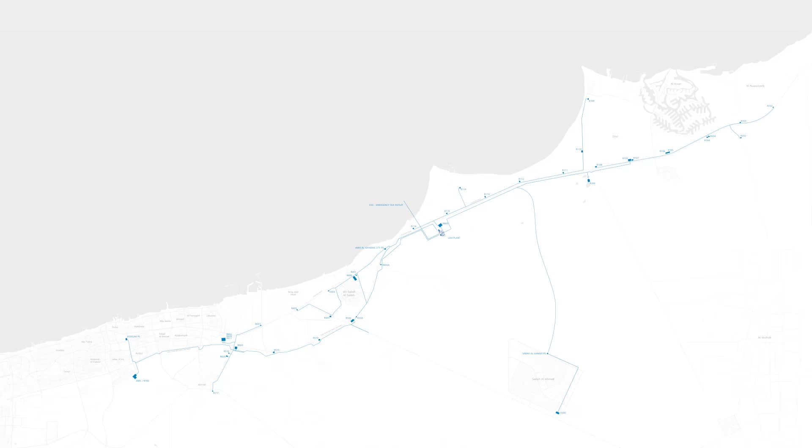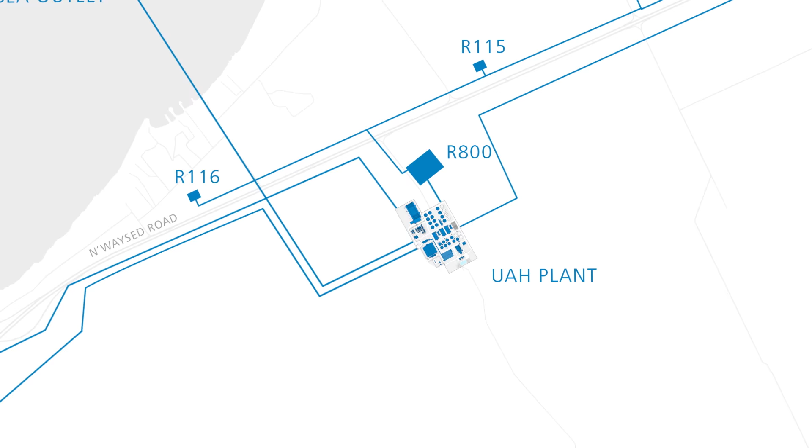Kuwait is one of the fastest growing economic regions in the world, and the population is also growing steadily, by up to about 3% per year. The mission of the Kuwaiti government is to provide an advanced infrastructure and sustainable living areas for the growing number of residents. Following an international invitation to tender, together with WTE and IFA, it intends to implement one of the world's largest wastewater projects for optimizing wastewater treatment systems as well as for wastewater transport, according to the highest environmental standards.

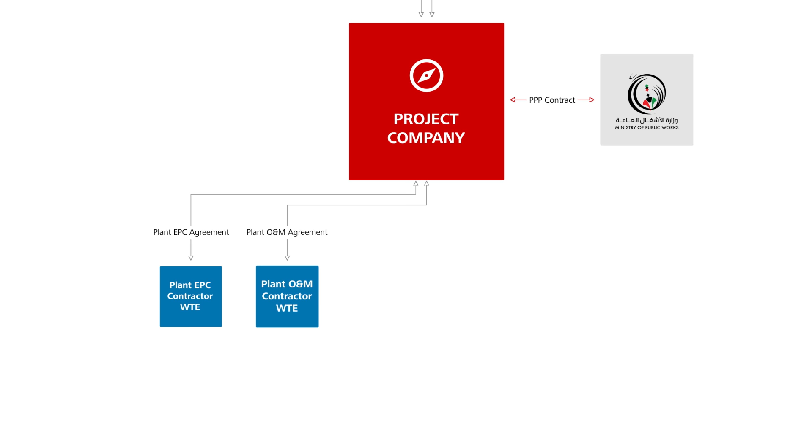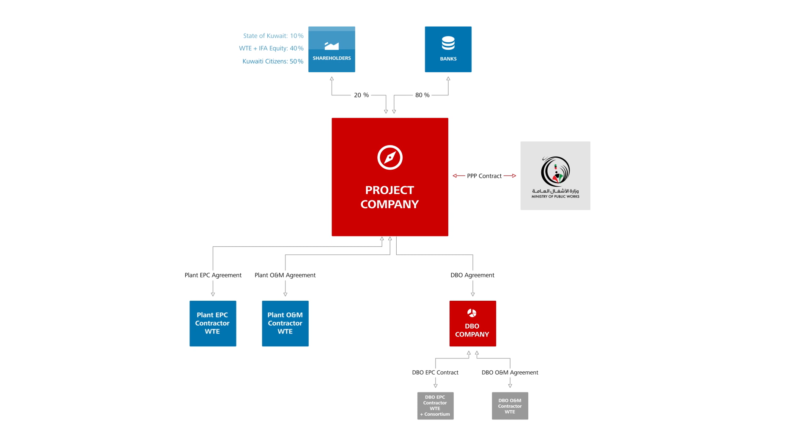The contract agreement further develops the classic PPP model into an advanced future-oriented feature adapted to local conditions. It especially implements the following milestones: 25 years of operation of the new wastewater treatment plant, participation of Kuwaiti public entities as equity shareholders, participation of Kuwaiti citizens via stock market shares, implementation of turnkey works for pipes, reservoirs and pumping stations into the project in order to achieve a maximum of cost transparency, construction time optimization, and integration of interacting assets such as wastewater transport and wastewater treatment systems.

The products resulting of the cleaning process are much more attractive and sustainable than people might assume. The Kuwaiti citizens are invited to participate as shareholders with guaranteed and attractive dividend. This will surely improve the acceptance of the public for wastewater-related issues. One of the key elements to be performed by the project company is the construction of the network with a length of about 450 kilometers. Another one is the pumping stations.

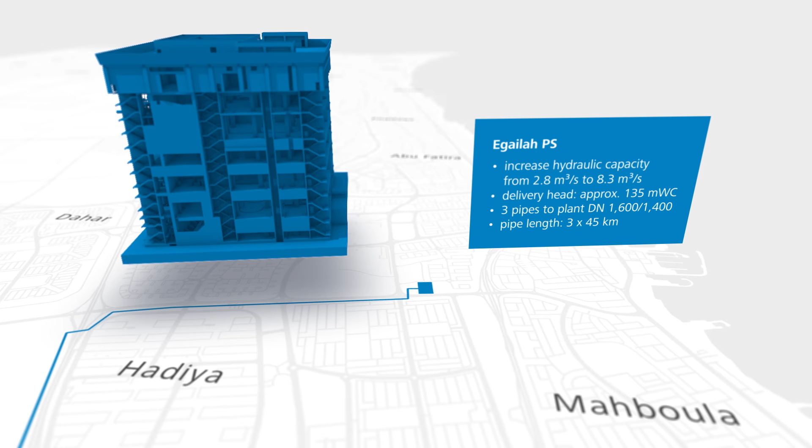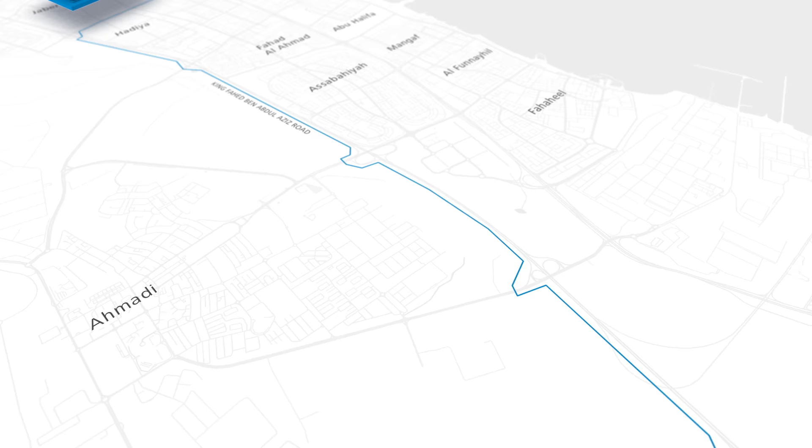The existing Egailah pumping station is located in the north of the project area. Its hydraulic capacity has to be increased from its current 2.8 cubic meters per second to 8.3 cubic meters per second, with a delivery head of about 135-meter water column. From Egailah, 3 parallel wastewater transmission mains lead to the plant in the south. They will be placed in a 45-kilometer-long corridor, mainly parallel to Highway 40.

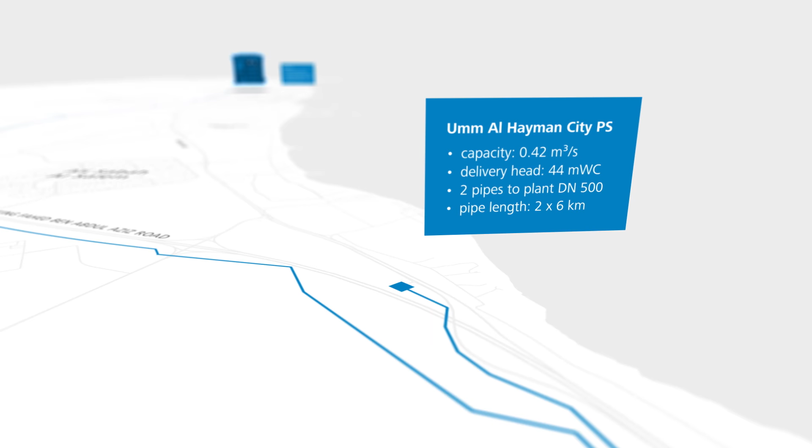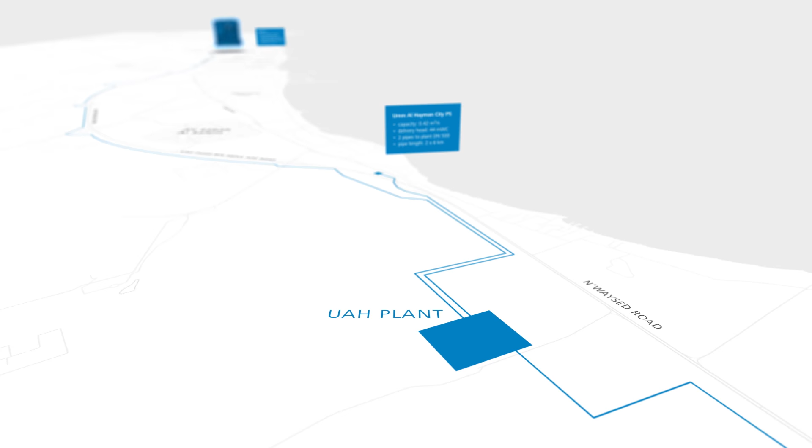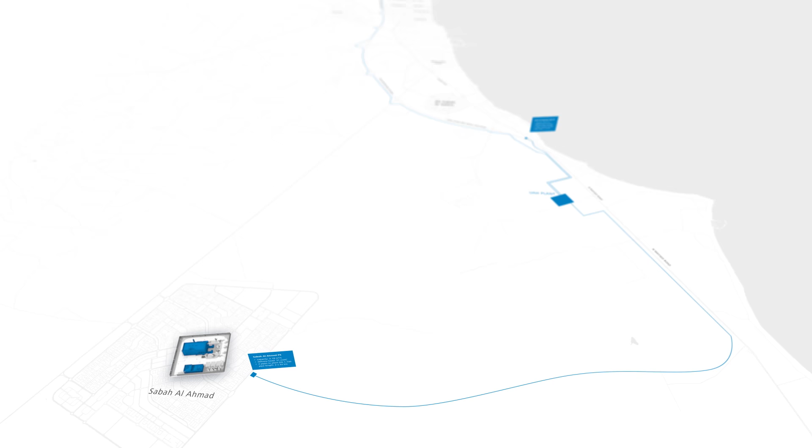Umm Al Hayman City Pumping Station is located approximately 6 kilometers northwest of the plant. After refurbishment, the existing pumping station will transfer the wastewater to the plant. In the southwest of the project area, the new Sabah Al Ahmad city will have its own pumping station with a hydraulic capacity of 2.2 cubic meters per second. 2 parallel transmission mains will transfer the wastewater over about 33 kilometers to the plant. The network and the pumping stations will be operated for the first 3 years by WTE.

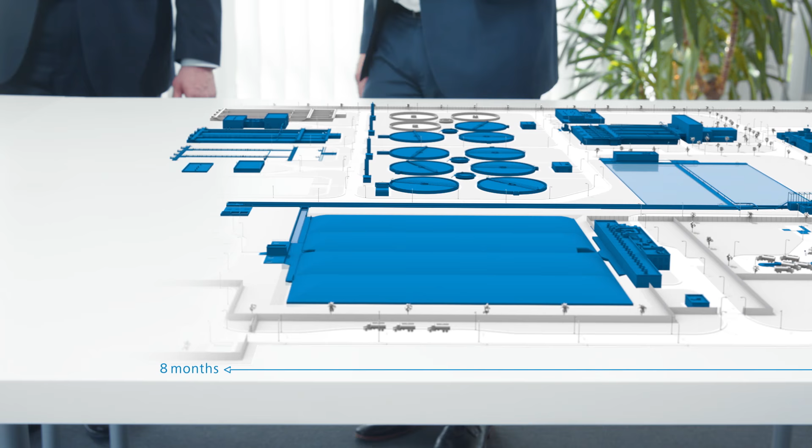Looking at the network, we will use ductile iron pipes with special lining and coating systems. They are well known as a high-end product with a long life cycle. Definitely the biggest challenge in this extraordinary project is the extremely tight implementation period. The project company shall implement the core elements within 30 months from date of signature and shall complete the remainder of the works within 8 months thereafter.

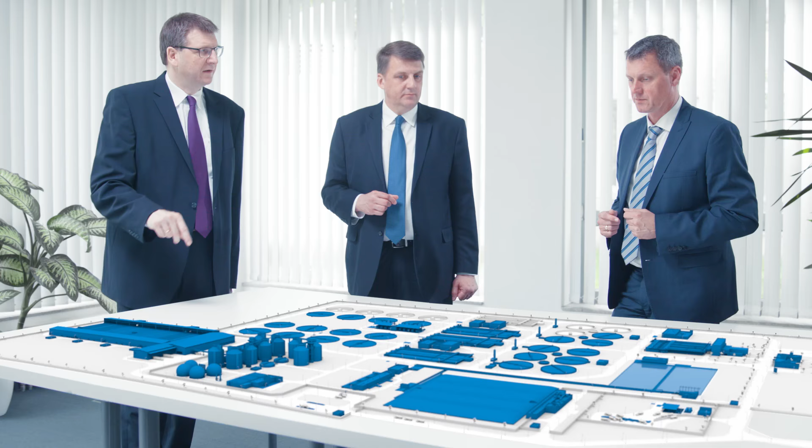The heart of the project is the wastewater treatment plant, with an initial hydraulic capacity of 500,000 cubic meters per day and 1.7 million people equivalent. The state-of-the-art design accommodates the possibility for further expansion to 700,000 cubic meters per day at a future date. The plant will treat the wastewater to the specified treated sewage effluent standards, which are more stringent than the local requirements.

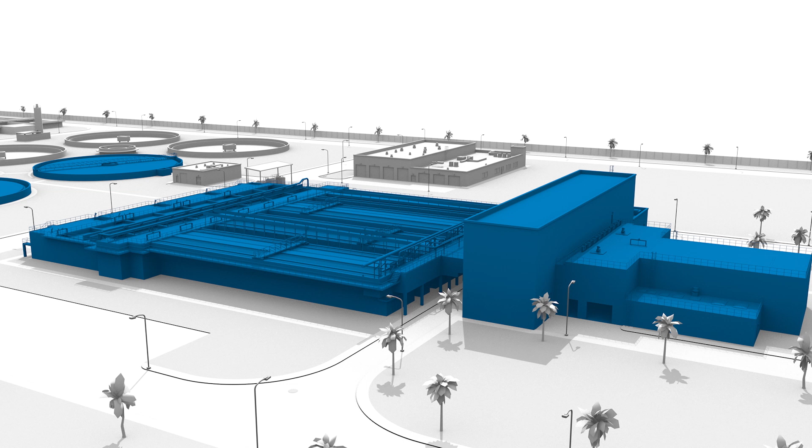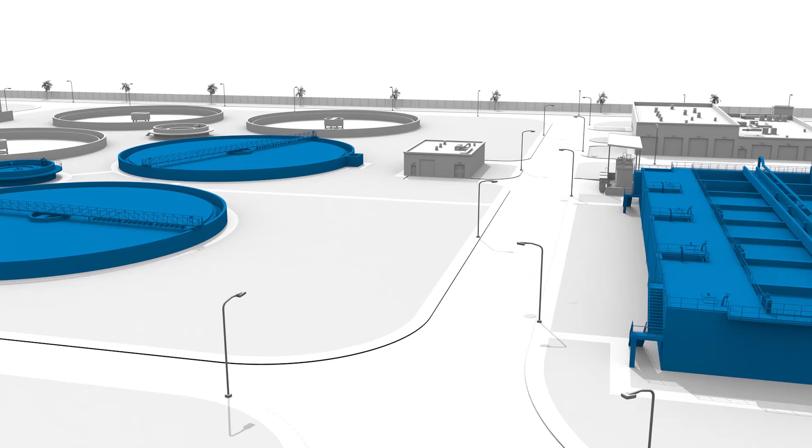All the wastewater from the pumping stations enters the plant in the terminal inlet chamber. From this chamber, the wastewater will be distributed to the inlet screening and the aerated grit chambers to remove coarse materials and sand as pre-treatment. After passing a pre-aeration zone, which can also be used as a flocculation zone, the wastewater will be directed to the primary sedimentation.

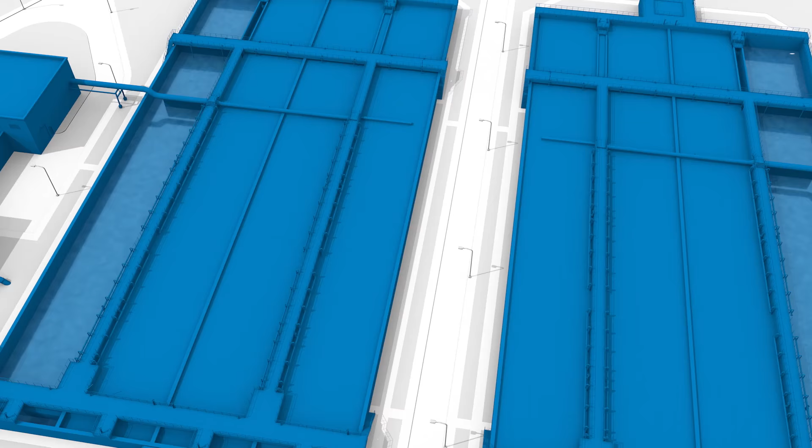The objective of primary sedimentation is to remove readily settleable solids and floating material, and thus reduce the suspended solid content. In secondary treatment, biological and chemical processes are used to remove most of the organic matter and nutrients like nitrogen and phosphorus. The processes mainly take place in the aeration tanks. Dissolved oxygen demand will be provided by highly efficient turbo compressors.

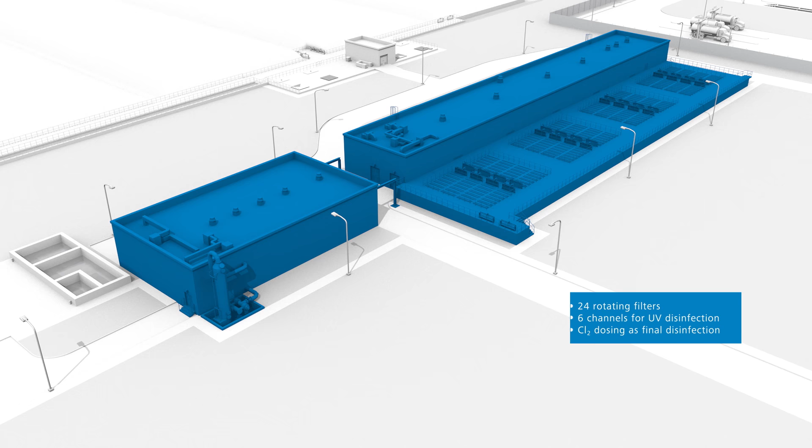The overflow from the aeration tanks will be sent to the secondary sedimentation tanks, where the suspended biological floc settles out while the treated water moves into the tertiary treatment. Tertiary treatment is the last step of the entire wastewater treatment process. After a filtration stage to reduce the solids, the water will pass an ultraviolet disinfection, followed by gaseous chlorine as final disinfection stage. The combination of the aforementioned process steps guarantees an effective disinfection with an excellent residual effect.

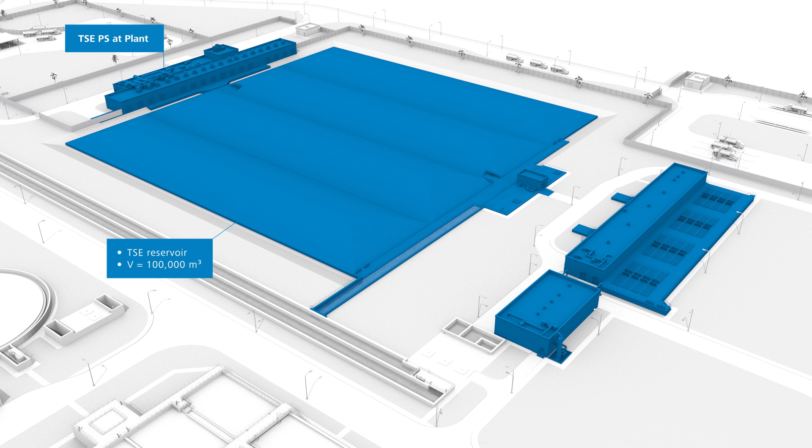After tertiary treatment, the wastewater has been transformed to a high-grade and valuable resource, which will be partly used as water for irrigation purposes. WTE, with its highly specialist employees, has implemented much more than 100 projects in the water and wastewater domain worldwide. All of them designed to ensure best available wastewater effluent standards.

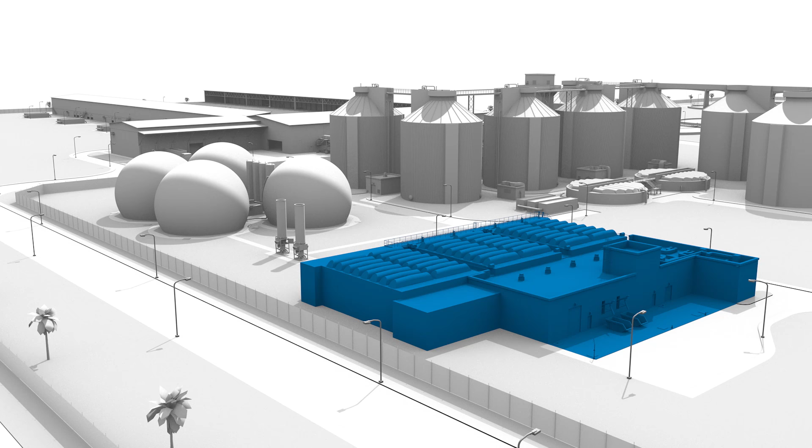But what about sludge? Today, everyone is focused on the best technologies for an effective treatment, environmentally friendly utilization of sludge. Each wastewater treatment produces sludge. By way of a two-step thermophilic, mesophilic anaerobic digestion, the sludge is stabilized. At the same time, biogas is produced. The biogas will then be utilized in highly efficient combined heating and power stations to meet most of the electrical and thermal energy needs for plant operation.

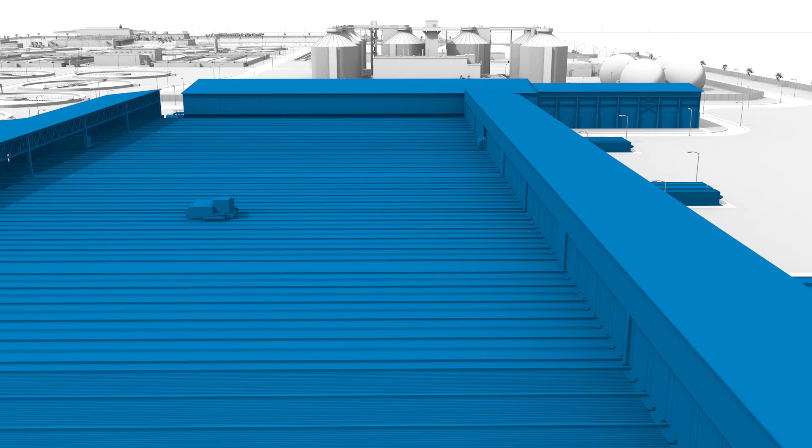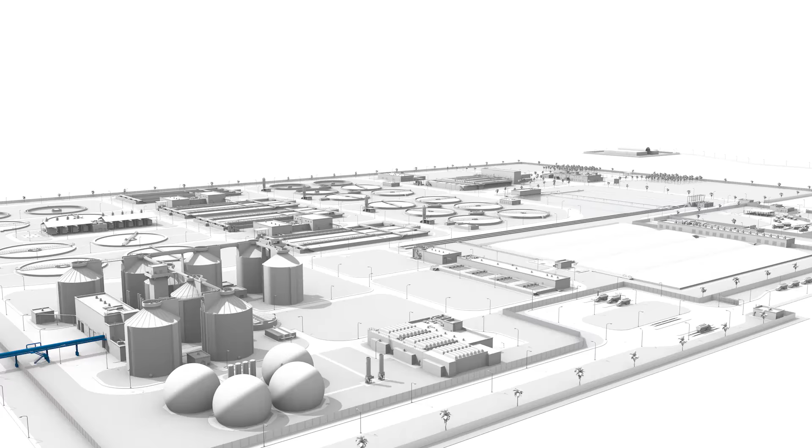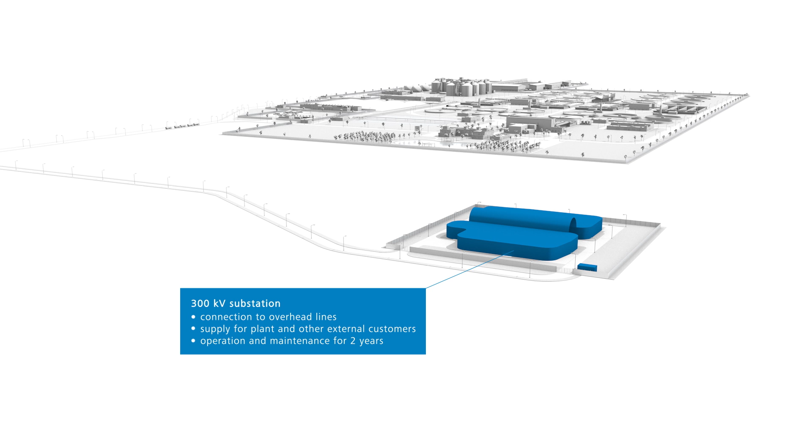After digestion, the remaining sludge is dewatered and further treated in a state-of-the-art and fully automatic lane composting. The final product, in Class A quality, can be used as fertilizer in agriculture. To secure the supply of electrical energy to the plant, an electrical substation and overhead in-feed line has to be constructed. The 300 kilovolt substation is designed with an additional capacity for the future supply of the Ministry of Electricity and Water clients like KOC and others.

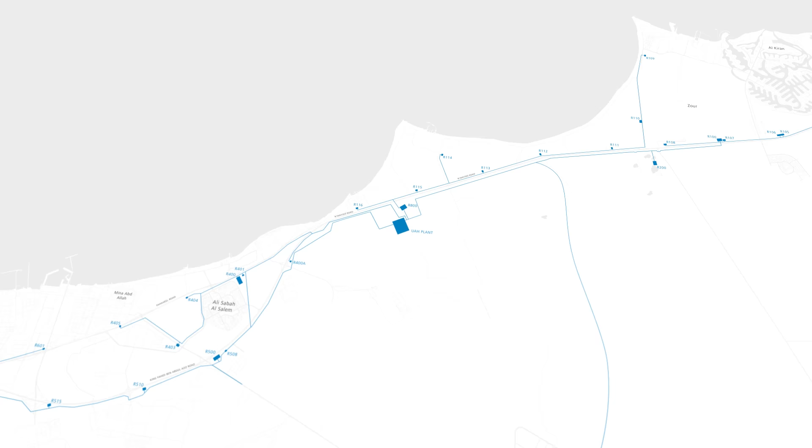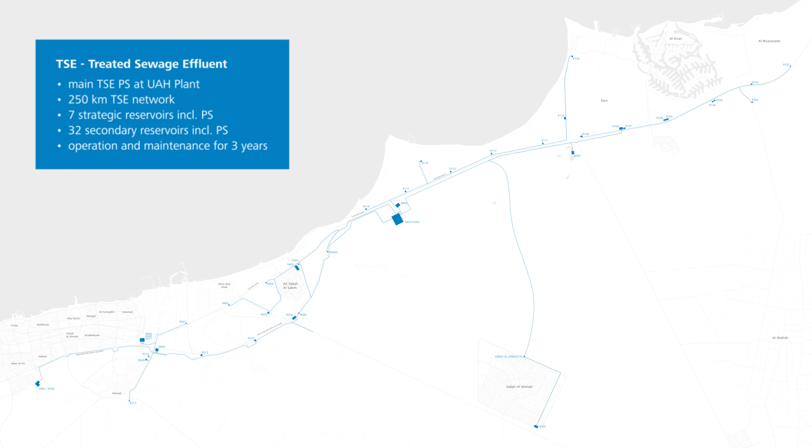Treated sewage effluent is an asset. From the plant, it will be distributed over the whole area. The industry and agriculture will benefit from this water. To secure this, a network with a total length of about 250 kilometers, including 39 strategic and secondary reservoirs with capacities of up to 160,000 cubic meters, will be implemented. Adjacent to the main reservoir, with a volume of 160,000 cubic meters, a data monitoring center will be implemented. The center will provide the functions, central administration and control, and laboratory in one location.

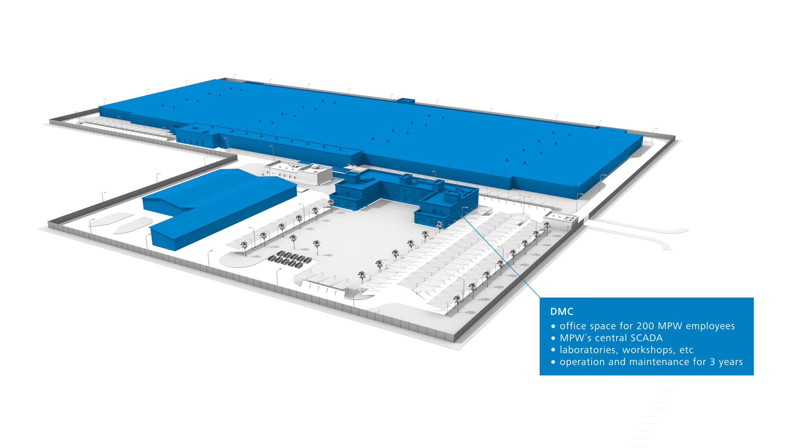The sea outlet shall be used to dispose of excess treated effluent to the sea. From the northeastern corner of the plant area, the pipe leads in a straight line to the sea, where it will be extended for another 2 kilometers. The construction method for this offshore part will be micro-tunneling.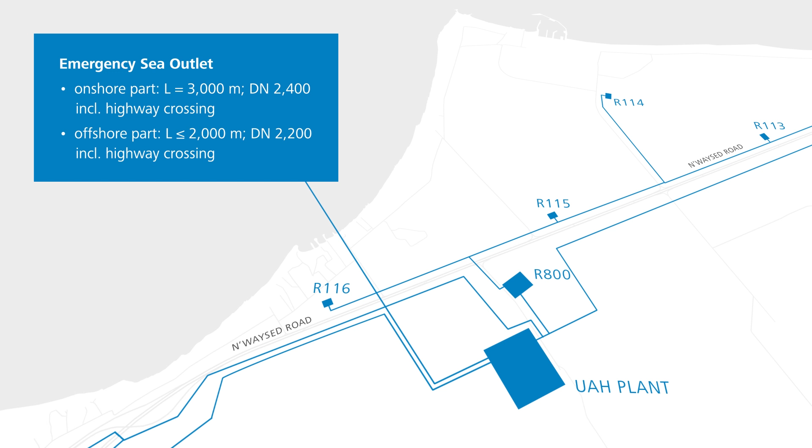The Umm Al Hayman wastewater project will serve more than 1.7 million citizens in the south of Kuwait and transform wastewater into green energy, compost as fertilizer, and water for industrial and agricultural use. This project will lead to a further improvement of the overall state of infrastructure in Kuwait's water and wastewater sector.

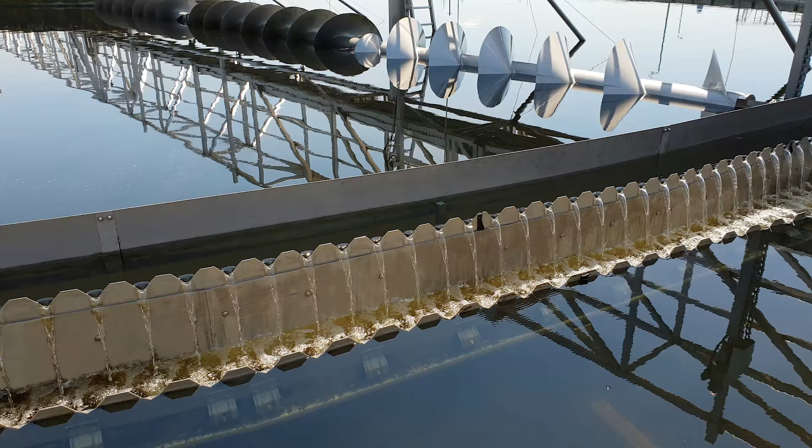By combining national and international expertise, the Umm Al Hayman wastewater project will emerge as a beacon project in the Middle East. It is characterized by its special contractual structure, complex technical concepts, innovations, the highest degree of security and sustainability. This challenging project will be realized in close partnership and cooperation between WTE, IFA, and the Kuwaiti Ministry of Public Works.